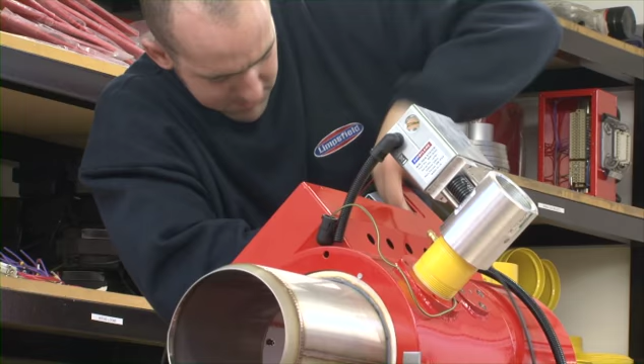Limpsfield Combustion Engineering is an industrial burner manufacturer established in 1995. Frustrated by the quality of burners he imported, Brendan Kemp of Autoflame decided to design his own and sold the designs to Limpsfield, a company he still advises.

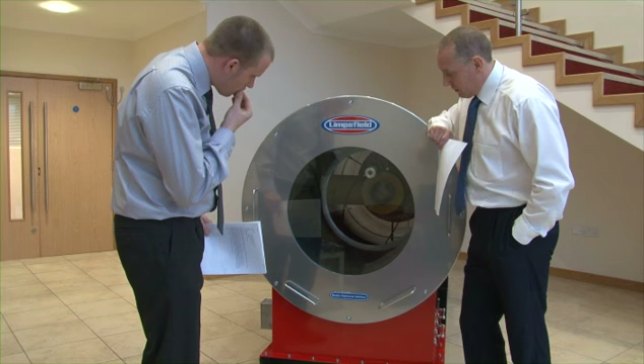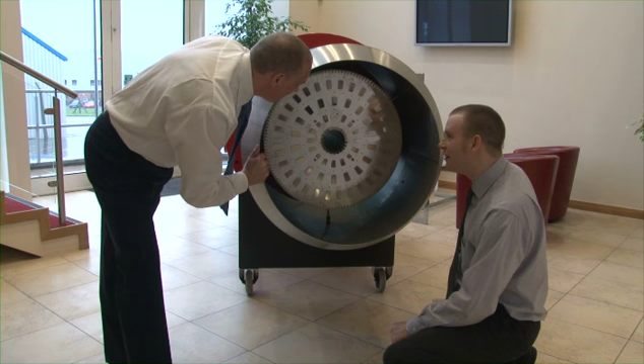When Keith Knowles joined the company in 2005, he brought with him the belief that for Limpsfield to succeed in the face of established competition, the company had to keep things simple and do those simple things well. Limpsfield's management style is to do it the simple way, do simple things and do them very well. A bit like the Bill Shankly method many years ago, if anyone knows football.

Brendan Kemp, who is a mentor of mine, I worked for him at Autoflame, a combustion company. He's an experienced manager as well as combustion engineer, and he taught me these things at a very early stage. Those things that we've tried to bring into Limpsfield on a daily basis to make it easy to follow, simple things, short lines of communication, so there's a lot less mistakes, or a lot less chance of mistakes.

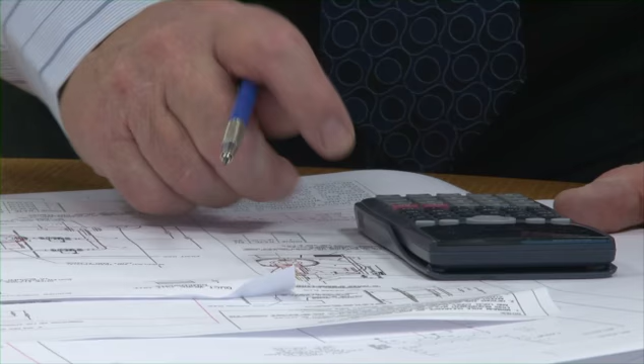As part of this approach, Limpsfield immediately invested time and money into getting all the necessary quality assurance and standard approvals. In order to progress, we realised that we had to make sure that we had all of the worldwide standards. So for England, Europe, we had to have CE standards. For America, we had to have the UL approvals. We set out to do those, and we actually completed all of those, as well as putting a complete quality assurance system in within 18 months.

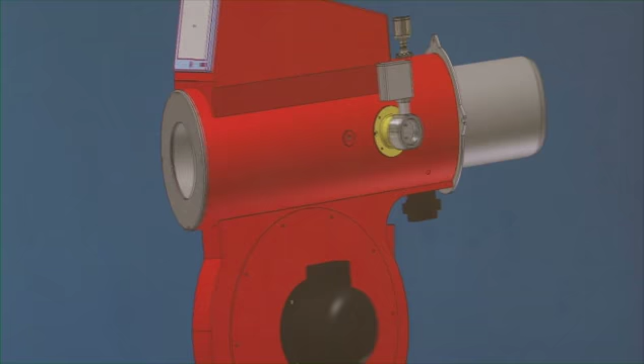That takes away a lot of the problems, or a lot of the reasons that somebody could say no to our product. Furthermore, the company adopted a philosophy of pumping all its profits back into the business in order to invest in equipment, focused on R&D, and develop new products.

They increased their burner range in keeping with societal changes, now offering burners that fire bio and landfill gases, and bought 2 Mazak 5-axis machines, bringing state-of-the-art precision engineering to the combustion world.

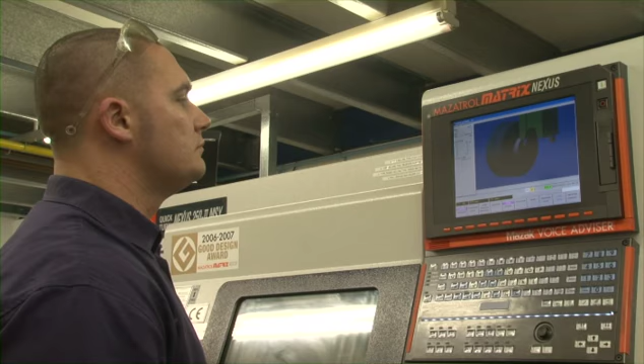At Limpsfield, we like to put our profits back into the company to focus on R&D, ensure that we have the correct machinery, the best products that we can supply our customer. Through this, we have to do research, development and testing to ensure that when it goes into the field, it is the best that it can be.

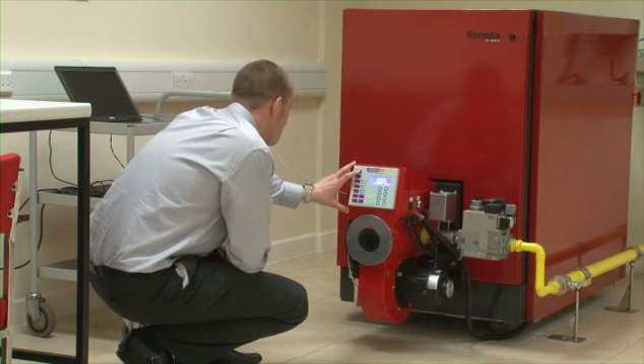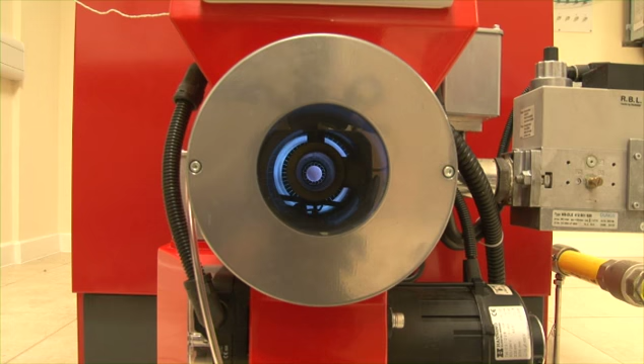This philosophy paid off as they started to design more efficient burners than their competitors. And knowing that any client contract would be based on ROI, they decided to guarantee an efficiency of the burner in their contracts. We found many years ago that we could run our burners with much less O2s, much less excess air than our competition.

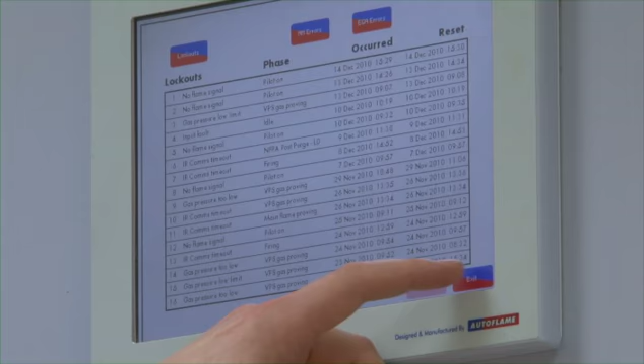We were the first company, and still the only company worldwide, to actually offer a guarantee of performance. This to our end users and also to our reps around the world gives them a much better chance of, one, selling the project, but also making sure they get a return on investment.

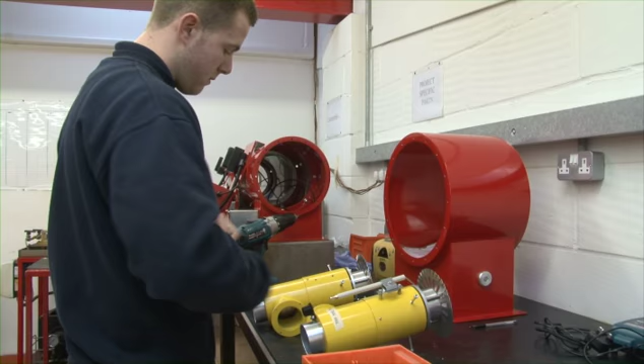This approach proved a success, and the company started to win contracts in the US, where it opened an office in 2006. Furthermore, Limpsfield achieved 30% growth last year despite the economic downturn.

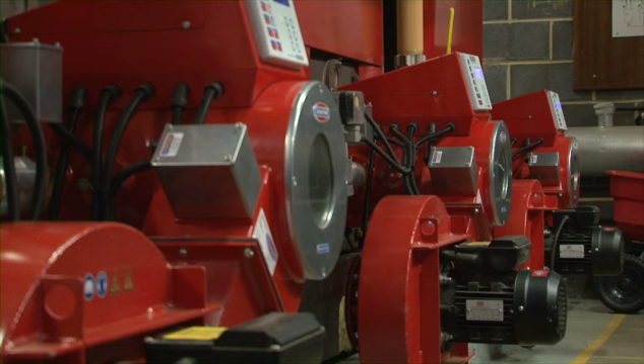The company's offering proves very attractive to clients in both the private and public sectors, where Limpsfield can not only make efficiency savings, but also meet new legislation regards emission.

We work with Limpsfield burners because of the increased reliability and efficiency gains that we can deliver our customers. We're very confident that we can deliver between 10 to 15% fuel reductions by reburnering with Limpsfield and Autoflame controls.

Increases in legislative requirements, such as the carbon reduction commitment, have increased the need for our customers to look at solutions like ours, not only to reduce their fuel consumption, but also comply with legislation.

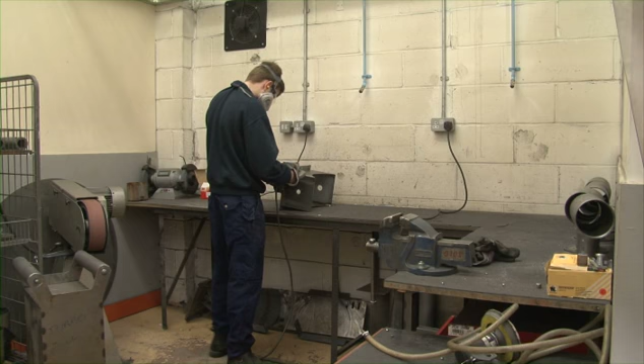Looking to the future and building on its technology, Limpsfield hopes to enter new markets, and to enter the smaller burner market where competition is much greater.

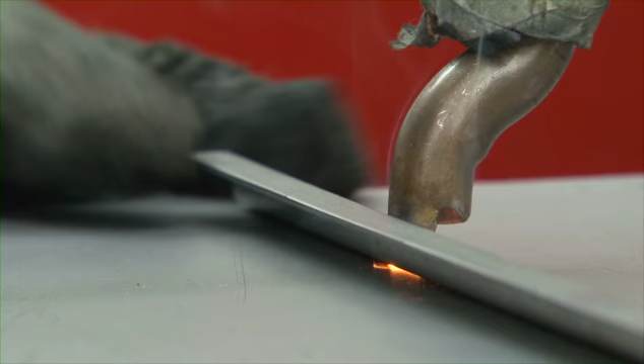We are seeking to look into the European market more. We're looking to go into the Middle East, Far East. We're also looking to develop more products. We have new burner ranges, packaged burners, cheaper burners, without sacrificing the quality.

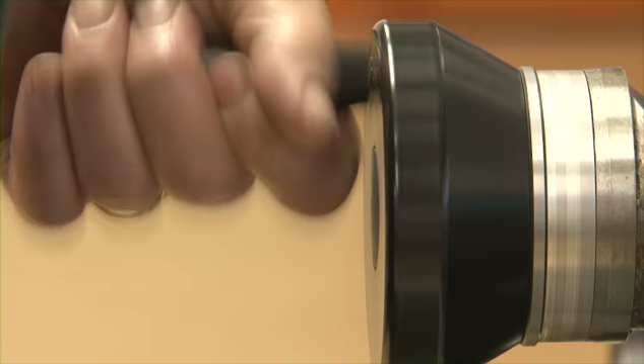If Keith Knowles continues to follow his mantra of keep it simple, and the company retains its model of investing its profits back into R&D, Limpsfield looks set to be generating heat within the industry for some time to come. We're feeling very confident about the future.

We mustn't be complacent. Must always remember that there's always going to be somebody out there trying to do what you're doing, trying to maybe copy what we're doing. We feel that we have a great product. We feel that we maybe have the best product out there in our market. We also feel that we have great people, great technical support. I believe those two go hand in hand. So I am confident, although of course you mustn't be complacent, but quietly confident of the future for Limpsfield.